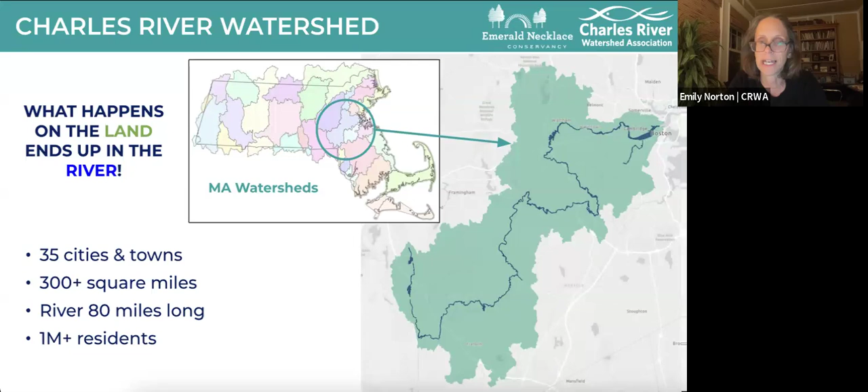So what are we going to accomplish tonight? We're going to go over what our objectives are with working with you to create this vision plan for the Muddy River watershed - a quick history about how we got here, current conditions as we've ascertained them, and what some future possibilities are, and then next steps from there.

So, vision plan objectives - what do we mean by that? Context: a lot of folks were reaching out to us during the summer.

They were asking, if Paris can make the Seine swimmable for the Olympics, why can't the Charles be clean enough for swimming? Granted, devil's in the details - the Seine wasn't 100% clean all the time, as we know. But the overall vision and goal remains the same ever since the 1972 Clean Water Act, which had as a goal fishable, swimmable rivers by 1983. We're not quite there yet. Then the 1995 Clean Charles Initiative out of the regional US EPA promised a swimmable Charles by 2005. Again, we have not hit that goal. We have not given up that goal, and we don't believe any of you have either.

We simply cannot have a swimmable Charles in the lower basin if we do not address the pollution in the Muddy River. As folks have probably heard, this is the most polluted tributary that we test, and we're going to be getting into some of that tonight.

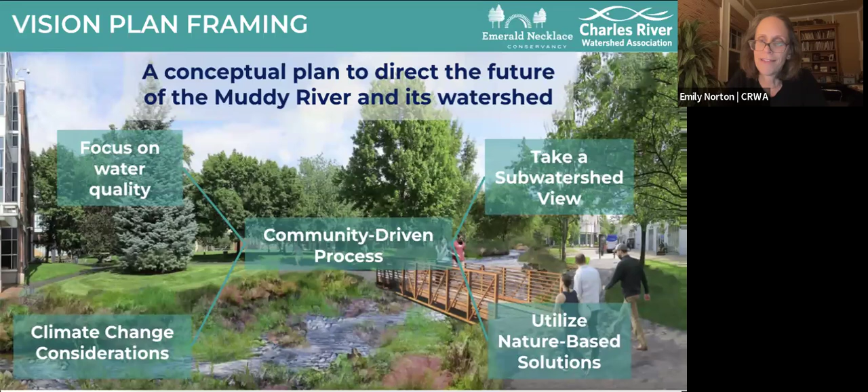And then, as I started out with, this is very much community driven. We are not just telling you the way we think it should be. We are offering up the science, the data, the future in terms of climate change, and then need you to be a part of the solution going forward.

The project team consists of three organizations: Charles River Watershed Association—on this webinar you've got myself, Lisa Kumpf, Max Rome, Amber Siegel, and Amelia Dick Fiora del Fabro—we are doing technical analyses and part of the community engagement team. Emerald Necklace Conservancy, we are so thrilled to be partnering with the Conservancy, particularly ED Karen Mauney-Brodek and Jack Schleifer. You've probably worked with them already in many ways and experienced the Emerald Necklace, through public partnership, land stewardship, and community engagement, which we are all engaged with. And then we're really happy to have CBI as our stakeholder engagement experts: Patrick Field, Elizabeth Cooper, and Artie Halby, who you heard from earlier, particularly on making sure we are engaging the community as effectively as possible.

And we are also thrilled to have so many partners from governmental agencies and nonprofits. This list is growing—if you know of a group, entity, or individual who you think should and would be interested, please let us know. We want to be as inclusive as possible, but we are so excited to have the folks listed here already on board and engaged.

In terms of the timeline, folks who've been involved so far know we've been having in-person meetings and webinars along the way. So where we are now is sort of the more expanded stakeholder outreach. We want to make sure folks who maybe didn't have a chance to hear the initial presentations last year can get caught up now as we move through this two-year plan. As you can see, the plan is to be complete in March with a final vision plan that people have had a chance to be engaged and excited about, and ideally help us lobby to implement.

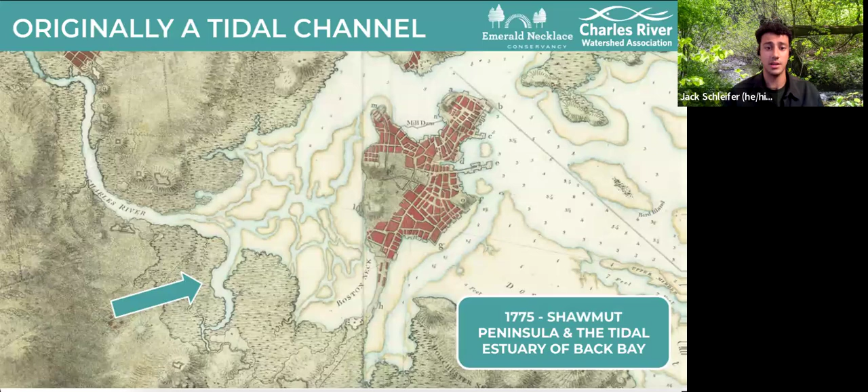As colonization expanded and development continued in Boston, there were many challenges that came with the tidal nature of the Muddy River. In the late 1700s it was a tidal estuary, also a raw sewage dump, and there were a lot of challenges with how stinky it was and how unstable the land was. So a lot of the land was backfilled and turned towards what we now understand.

Then in the later 1800s, Frederick Law Olmsted came along and further shaped this landscape into the park system we see today. Although there have been some eras of redesign since then, he's the person most credited with shaping the system into how we see it right now.

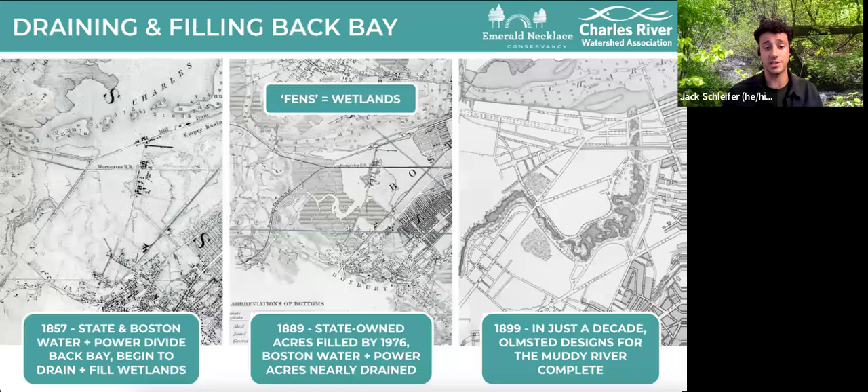If we go to the next slide, we can see that this system fell into an era of arguable negligence or lacking maintenance. In the late 1900s, about 100 years after its creation, there was record rainfall. Some of us might remember all of it.

And it caused a whole bunch of flooding throughout the city. When the system was designed, its intention was to be a stormwater management system for Boston, Brookline, and the whole watershed, which includes Newton and others. But this work hadn't necessarily been kept up on or maintained, and that year posed a huge challenge.

So the Kenmore T station flooded, the first floor of the MFA flooded, and this is kind of the Conservancy's origin story, because we were established to work within the system and help steward it to ensure this wouldn't happen again. At this time, this kicked off and catalyzed what was called the Muddy River Restoration Project.

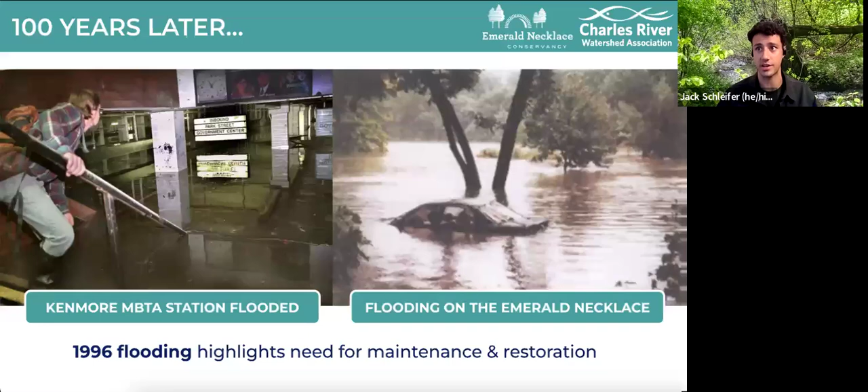If we go to the next slide, that's a project I'm sure many of you know quite intimately, because it's been ongoing for the past 20 some odd years. It had the goals listed here of reducing the flood damage potential of the system, improving the water quality, also looking towards aquatic and riparian habitat as well as landscape features, and doing this all under the guide of best management practices for implementation.

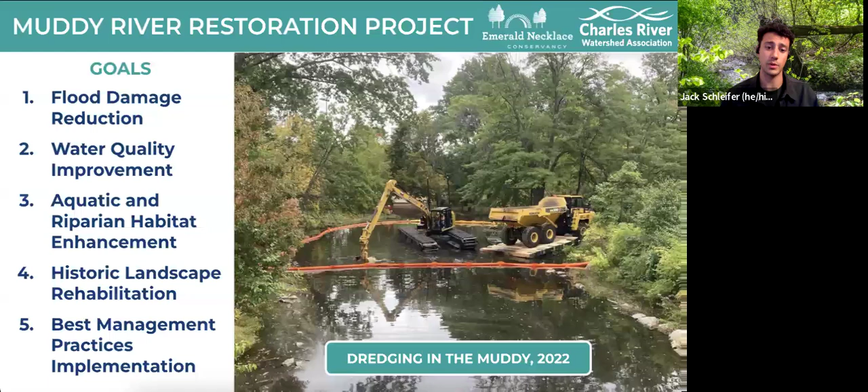A lot of this concluded, if we go to the next slide, in 2023. This shows the whole timeline, starting with those floods and the conception of the project in the late 90s, then a whole bunch of permitting and paperwork that was necessary before approvals could be sought. Construction really began in 2013 and concluded with its second phase of work in 2023.

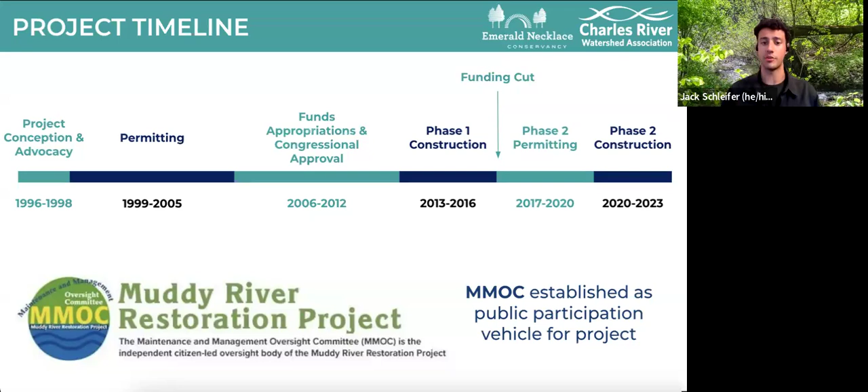So we're at a really interesting point right now to be able to look back at this project and evaluate how effective it was, and make sure we're still oriented towards the future, thinking about what improvements we can build on all this work that's been done.

If we go to the next slide, it says it was built in two different phases. In the first phase, we focused on restoring Liff Park, which was once a parking lot, into what's now a park space, which is beautiful and poses a whole bunch of challenges for environmental managers like myself. But it's a real win from an environmental restoration perspective.

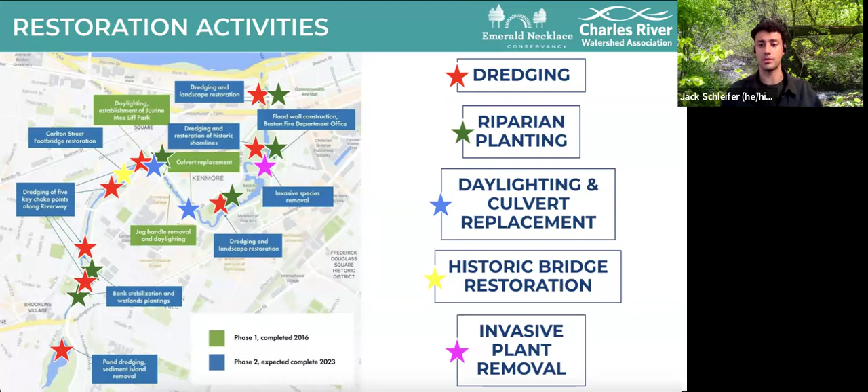I'd like to emphasize that although these are all amazing changes, they all happened directly within the Emerald Necklace. I think it's important as we move into this project to think about how we can expand our scale and look at the system from the watershed view, thinking about what solutions might exist both in the necklace and outside of it to help improve the water and conditions coming into our Muddy River.

And this was done by the Army Corps of Engineers, but in conjunction with the leadership of Boston, Brookline, DCR, and then a whole bunch of community members like yourselves. So if we go to the next slide.

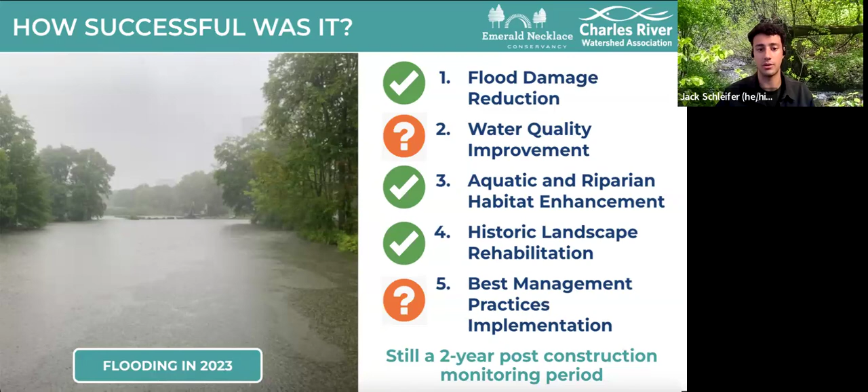So we're going to get into existing conditions of the Muddy River, but first I'm just going to get into a few basics to ensure that we all understand what's going on and what we hope to achieve in the Muddy River subwatershed. So, next slide.

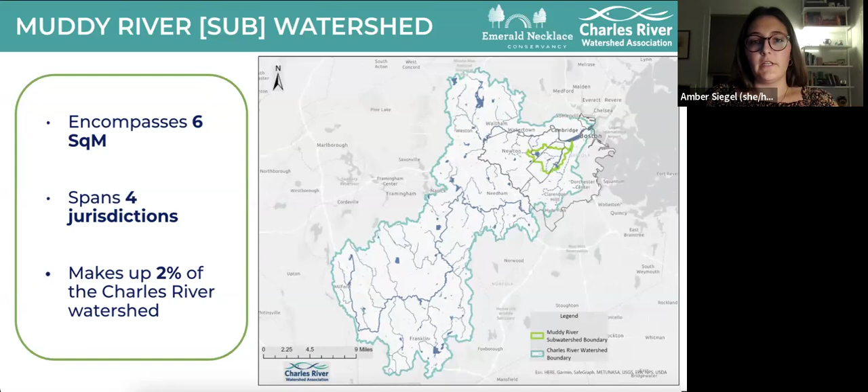As Emily mentioned, we're taking a subwatershed-wide view. To reiterate what that means, a watershed is the total area of land that drains into a body of water. So in this case, it would be the geographic area that drains into the Muddy River. Subwatersheds are a section of the larger watershed. For example, the Muddy River subwatershed makes up a part of the larger Charles River watershed, or in this case, 2% of the Charles River watershed.

So next slide. Specifically, the Muddy River watershed spans 4 jurisdictions, which includes Brookline, Newton, several Boston neighborhoods, as well as DCR-owned land. 60% of the subwatershed sits within Brookline, and 53% of Brookline is within the subwatershed, meaning that Brookline is really quite a crucial part of the Muddy River subwatershed and the work that we're seeking to do. So the takeaway there is just that water quality in the Muddy depends on the activities in the entirety of its watershed, because all of that water is flowing into the Muddy River.

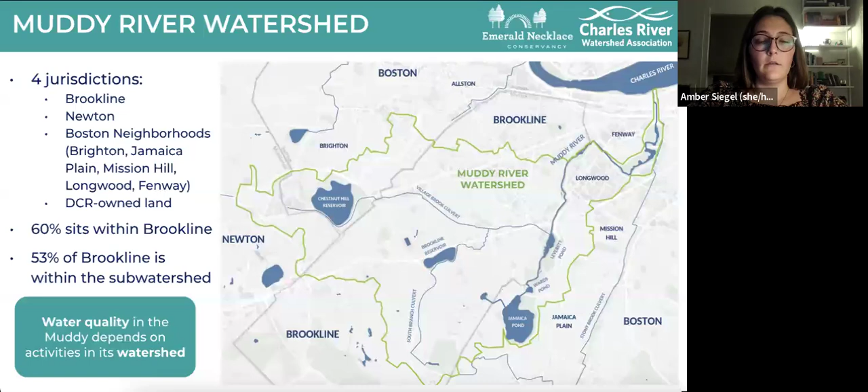So next slide. Our key takeaway number one then is rivers are watersheds. The Muddy River is not just a river, it's an interconnected watershed, and we really have to pay attention to everything that is going on throughout the entirety of the watershed, which here includes Boston, Brookline, and Newton, amongst others.

This runoff can be problematic for the health of our waterways, as well as the well-being of our communities. Stormwater runoff, or wet weather pollution, occurs when heavy rain events cause stormwater to pick up pollution from our highways, parking lots, and roads, carrying them straight into our river, which degrades the ecosystem and further threatens public health.

A common issue with wet weather pollution is the existence of combined sewer overflows, which we do have in the Muddy River. In a combined system, when water flow is high, sewage and stormwater combine, overwhelming the pipe and flowing into the Charles River. When there's less rainwater, it's able to flow toward the treatment plant instead, but in heavy rain events, this is not the case, and it flows into the Charles River.

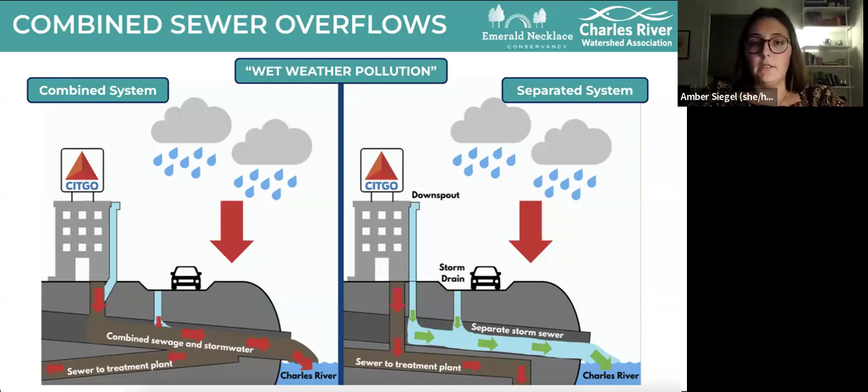Now a bit about dry weather pollution, which is pollution we see regardless of storm events. The first type is illegal direct connections, or illicit connections, where wastewater or sewer pipes from a building have been unlawfully connected to stormwater drainage pipes. This can occur in older buildings, but we also see it in newer buildings, and it drains right into the river, threatening and damaging our water quality as well as public health.

We also see this as a result of leaky pipes, which can be due to older broken infrastructure. In this case, wastewater seeps out and leaks directly into the stormwater drainage pipes and then into the Muddy River. Both illicit connections and leaky pipes, which can occur during dry weather events, are negatively impacting the Muddy River as well.

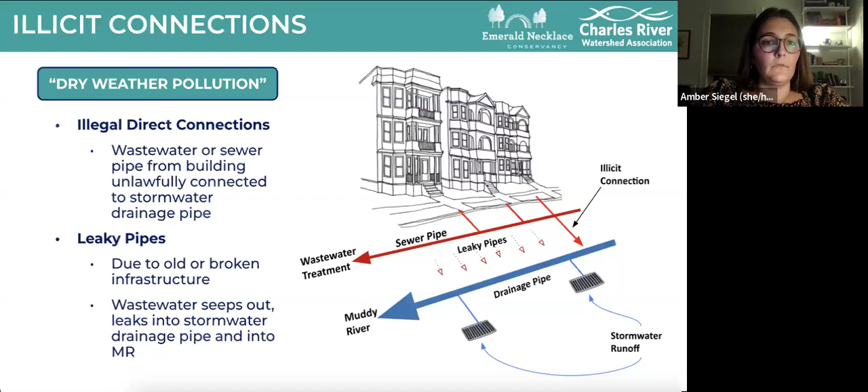Now I'm going to hand it off to Lisa, who's going to speak a little more specifically about these issues in the Muddy River and its subwatershed. Thanks so much, Amber. Hi, everyone. My name is Lisa Kumpf, and I am the River Restoration Program Manager at Charles River Watershed Association.

I think Amber set it up nicely, and now we're going to focus on each of these issues as they exist in the Muddy River subwatershed. This map shows all the grayed areas are impervious surfaces, so roofs and roads, throughout the Muddy River watershed. By calculation, 44% of this watershed land is impervious, which is a pretty high number.

It's not as high as some really dense neighborhoods in Boston. You can see some of the denser areas are by the Longwood area, and there are some less dense areas in the South Brookline area. But on average, 44% is impervious, so that means we definitely do have these stormwater runoff issues.

There are over 20 different outfalls that drain directly into the river, and there are four major subbasins that we think are contributing a lot of runoff into this area. You can see on this diagram those subbasins. The biggest major one is Village Brook, which is dotted here and starts all the way up in the Chestnut Hill Reservoir area.

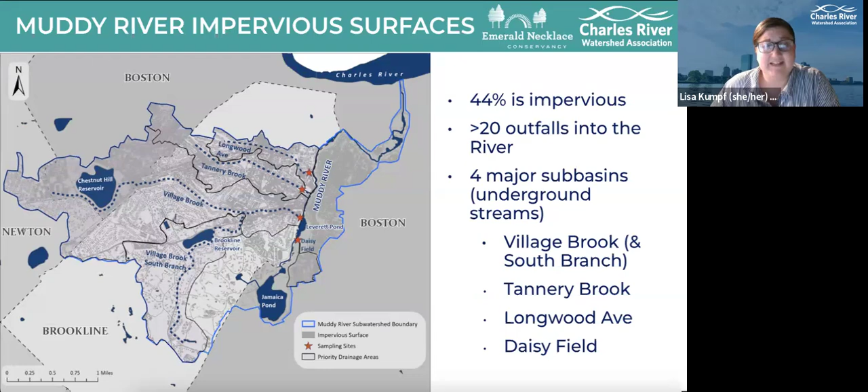Which are essentially underground streams. With a kind of back of the envelope calculation, more than 50% of the water coming into the system in the Muddy River is coming through that Village Brook system, the South Branch and the main branch of Village Brook, which is quite significant. So these pipes are really carrying a large volume of water, and all of that water is stormwater runoff that's picking up pollutants along the streets as it comes down. And there is a lot of area where, if you're thinking about the underground pipe network, there's potential for these illicit connections and leaky pipes that Amber talked about.

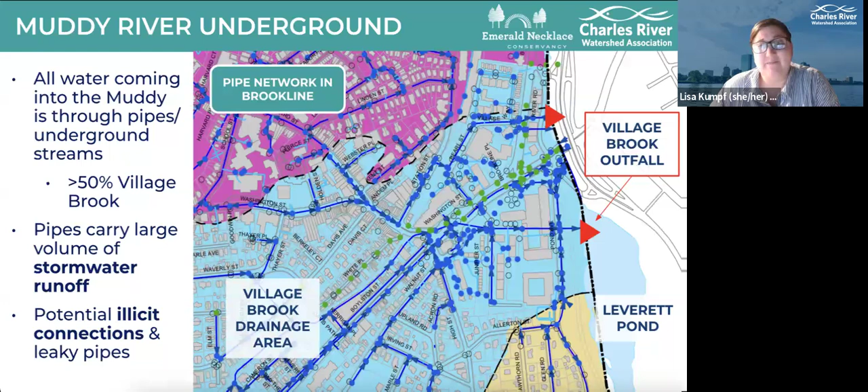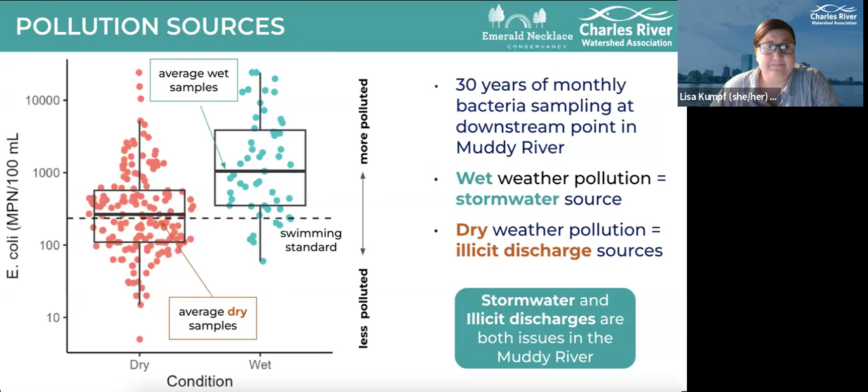And I wouldn't be without mentioning a CSO that we do have in the Muddy River as well. Now, this CSO is actually a little more complicated than your typical CSO in the Boston area, because the Muddy River used to be a tidal channel. Another tidal channel network that was right next to the Muddy River was the Stony Brook tidal channel.

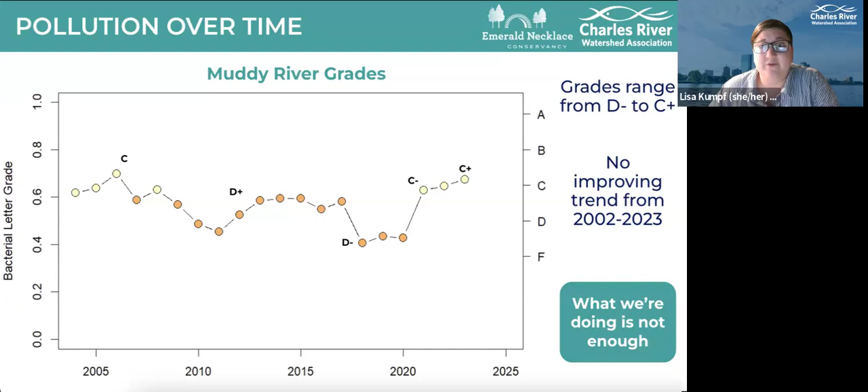They're not doing enough to improve water quality. So this comes to takeaway message number 2. We really need to address these urban drainage challenges, including stormwater runoff and illicit discharges, that wet weather and dry weather pollution, in order to focus on the water quality of the Muddy River.

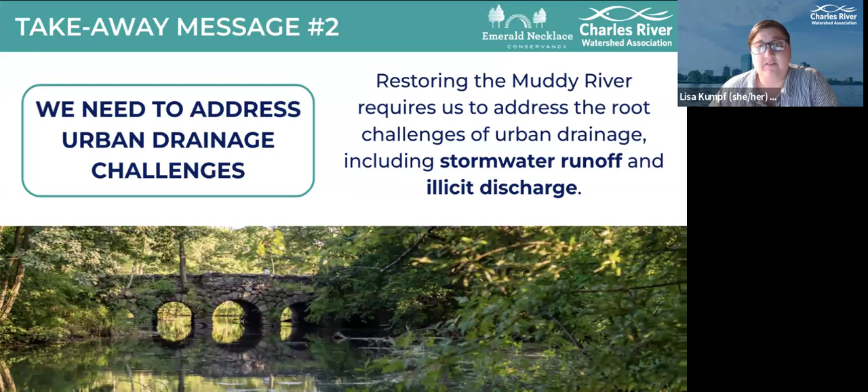I'm seeing so many great questions in the chat, and I'm getting distracted, but I'm going to ignore them for later. So I'm going to talk a little bit about where do we go from here? What can we do?

Just to reiterate, the way CRWA likes to approach these water quality challenges is to really think about nature-based solutions. How can we clean up the river? How can we clean up the inputs into the river? Using nature, letting plants and the landscape do the work as much as possible. That's not always possible, but that's where we like to start and how we try to prioritize some of our suggestions.

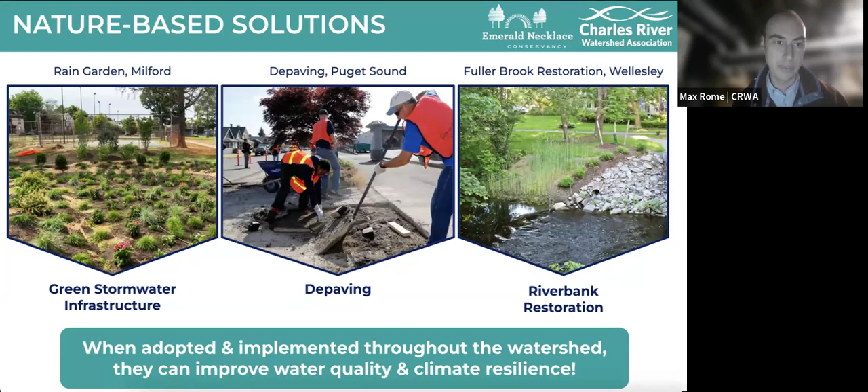I think it's important to picture where we can come in and make improvements. A useful way to think about it is to imagine the drainage system and consider that we can make interventions before the pipe - helping get water into the ground, flowing through planted systems before it ends up in the stormwater network. We can also make interventions within the pipe network.

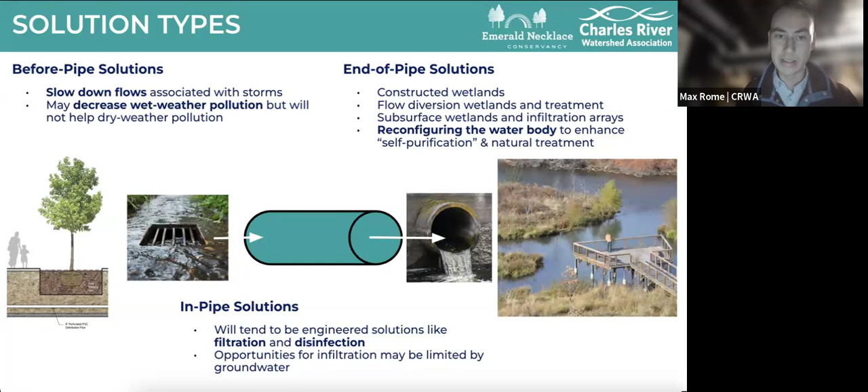This is what we might call in-pipe solutions. These solutions are going to tend to be much more engineered. There's less opportunity to work with nature and do nature-based design, but it's something we've got to consider. And then finally, end-of-pipe solutions, we're also looking at solutions that correct these sources of pollution, mitigating them as they enter the natural environment. So how can we enhance the Muddy River's own capacity for self-purification? How can we help fulfill this Olmstedian vision of a working landscape that's not only scenic and provides habitat, but that's also processing the nutrient and pollutant load from the city in a way that's healthful.

So before the pipe, this is where we really have an opportunity to use green infrastructure. These are improvements that can be made to the streetscape of the city using techniques like biofiltration, tree trenches, rain gardens, permeable pavers - anything that we do to decrease impervious area ahead of the pipes and increase the amount of greenery and opportunities for water to get into the ground. That's what we're talking about when we talk about before-pipe solutions.

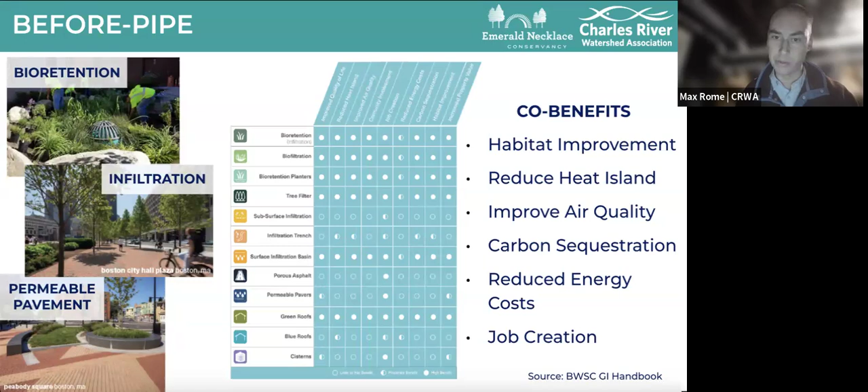These solutions are going to have a major positive impact on wet weather pollution. They can also really have some benefits for the community, for the neighborhood, but they're not going to have a big impact on the kind of dry weather pollution that Lisa was highlighting.

In-pipe solutions - this is a bit of an emerging field in stormwater, or an emerging application in stormwater. As we attempt to reach our Clean Water Act goals, fishable, swimmable river, there are situations in which we realize that stormwater flows are very complicated and very polluted. And there are situations in which we need to treat stormwater a little bit like we would treat wastewater. That means using a very engineered system that might include pretreatment, a media filter, some kind of proprietary treatment system, and might even include something like UV disinfection. These would be systems sized to deal with, not the surging flows associated with a big storm, but systems sized to deal with that contaminated base flow, that average median background flow that's really driving poor water quality during dry weather conditions.

I think this is a bit at the frontier of what's being done now, but there are examples, even in Massachusetts, where this approach is being taken to contaminated stormwater.

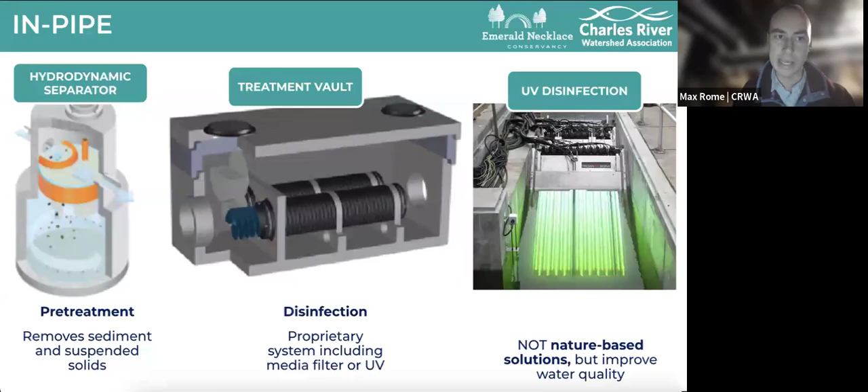CRWA led, I think, a pretty terrific walk through the alewife constructed wetland this summer. This is a real jewel in our region in terms of showcasing a system that is treating water, but is also habitat, and is also an incredible public amenity.

This is essentially a stormwater wetland that resulted from the separation of 400 acres of combined sewer area in Cambridge. It not only provides storage to equalize heavy storms and prevent flooding, but it's also designed to sequentially provide water quality treatment, from a sedimentation basin that lets particles and debris settle out of the water, to a series of biofiltration trenches and planted pools where there's the opportunity for natural attenuation of bacterial contamination before that clean water is released into the Alewife Brook.

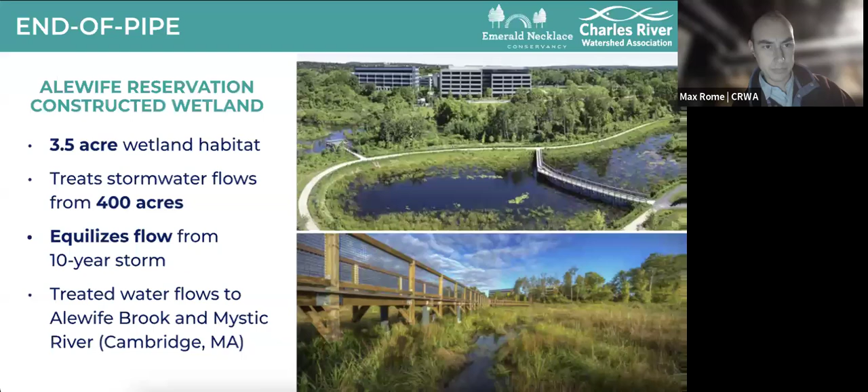Next slide. In addition to thinking about where we can make interventions, I think it's also useful to think about where in our regulatory system there is pressure, incentive, a framework to make these changes.

One of the really big permits governing this work is the municipal stormwater permit system, also called MS4. This places somewhat major requirements on the cities of Boston, Newton, and Brookline to clean up their stormwater and to find up to 50, or in the case of Boston, even 60% reductions in stormwater pollution into the Charles River and also into the Muddy River.

The MS4 permit is mostly framed around phosphorus and nutrient pollution, but doing this work to get stormwater into the ground instead of right into these stormwater pipes is also going to have a really positive effect on bacterial pollution in the Muddy River. So there's a lot that can be done to align those MS4 goals with the work that we really want to see happening in the Muddy River watershed specifically.

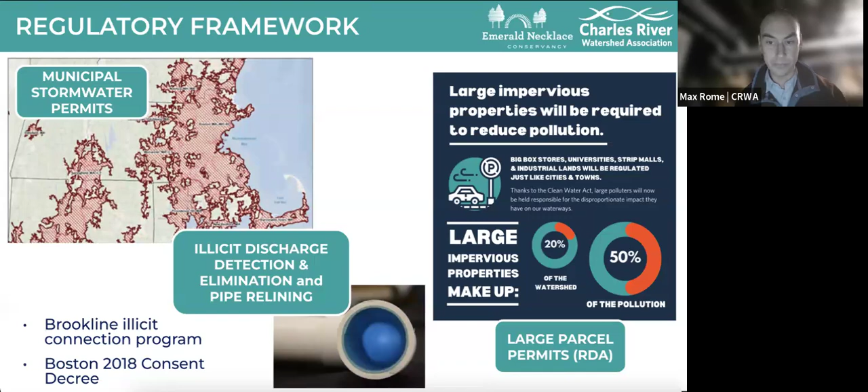Next slide. In addition to these ongoing regulations, there are some big and meaningful projects that are going to be happening in the Muddy on this 5-year horizon. There's dredging that's in permitting for Willow Pond.

BWSC is in a pretty advanced design phase with some infrastructure improvements to the Daisy Field drainage system that will really do a lot to reduce sedimentation and bacterial contamination into Leverett Pond. DCR is in the midst of a comprehensive rehabilitation of their many, many stormwater outfalls that drain into the Muddy. And then finally, there's a major revitalization plan for the entire Charlesgate area, which includes a realignment of Storrow Drive and a daylighting of the connection between the Muddy River and the Charles River.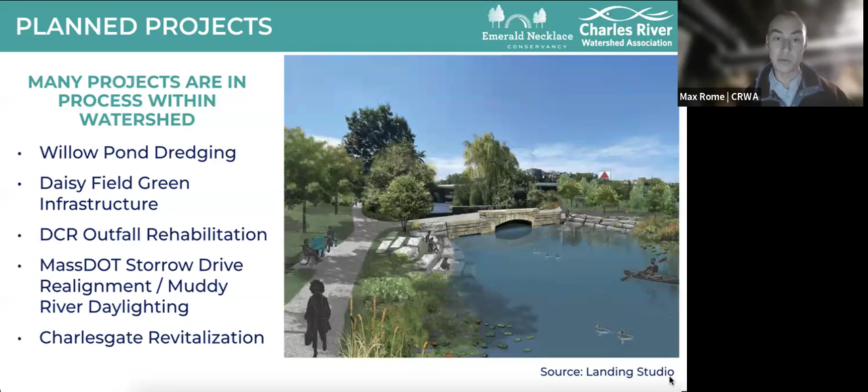That is really supposed to be kicking off in 2028. And that's going to be a huge project that's going to really increase the amount of flushing out of the Muddy River and the amount of interchange between the Muddy and the Charles River. That should have very positive water quality impacts for the Muddy River.

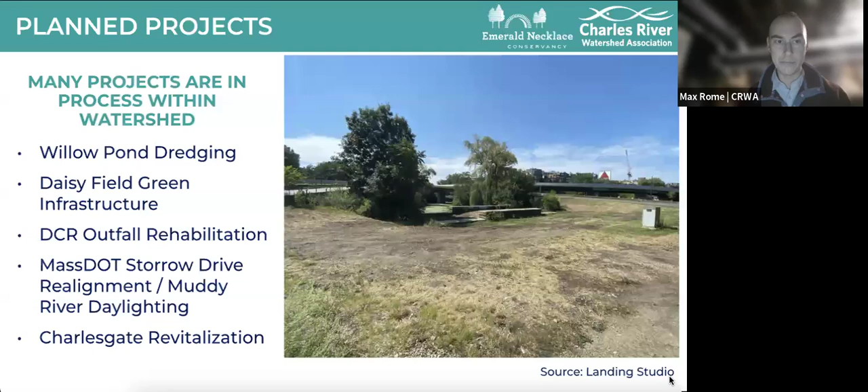So to bring this all home, this is a big project. This is a major undertaking that we're talking about. But we can do big things. It's worth investing in, worth really thinking about, worth really coming up with a vision about.

This is an opportunity to not just secure a climate resilient future for the Muddy River and deal with flooding, but to really secure a biodiverse and ecologically vibrant corridor in the center of Boston, right here in Boston and Brookline. All of us at the Charles River Watershed Association spend a lot of time on the main stem of the Charles River, which in places looks really great.

But when you get out on the Muddy, especially if you're able to get out on a boat, you're going to smell sewage. You're going to see toilet paper hanging from low branches in the brook. You're going to see places where the brook looks one color and the water coming in from the Tannery Brook outfall looks a completely different color.

The Muddy is today where the Charles River was in 1995, and with really good work, the Charles River went from a D to an A-, and that's what we need to do in the Muddy. The people in this room, the people in this conversation now, are the ones who can really make that difference.